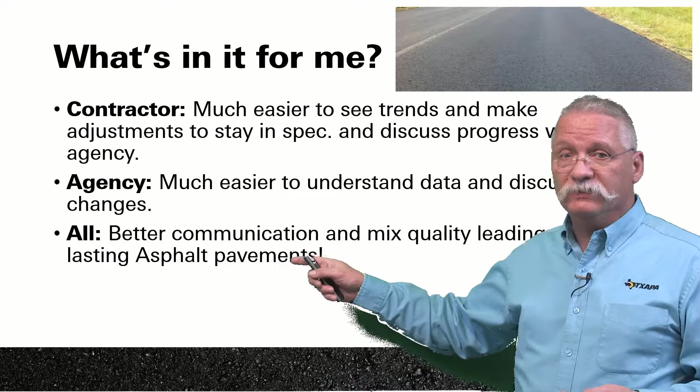From the agency, TxDOT, city, or county, when you start to see that, you can better understand the data, so you can understand with the contractors what's going on. So essentially what we're all talking about is better communication and better mix quality, leading to what, Harold? Longer lasting asphalt pavements. And that's what we want. So that's what we want.

And it also will make your daily debrief a breeze. And we can talk about daily debriefs all along, that's one of the things we talk about in all the classes. The PIQs everywhere we're talking about consistently is communicating daily what's going on at a job site. So that's a key aspect of the whole program here.

All right, so let's keep going here. And higher quality asphalt is what we're looking for. Get my belly out of the way. We want to make this easy. Okay, we want to make this easy.

So you've got asphalt plant operations and you've got laydown operations. There's lots of things happening at the plant, but essentially the things we're testing are moisture, temperature, gradation, binder content, and volumetrics. Out on the roadway, we're also measuring temperature as well as density and ride. So this is the data that we have that we're also getting paid for in many cases, and now we want to be able to use that information a little bit better than we have in the past.

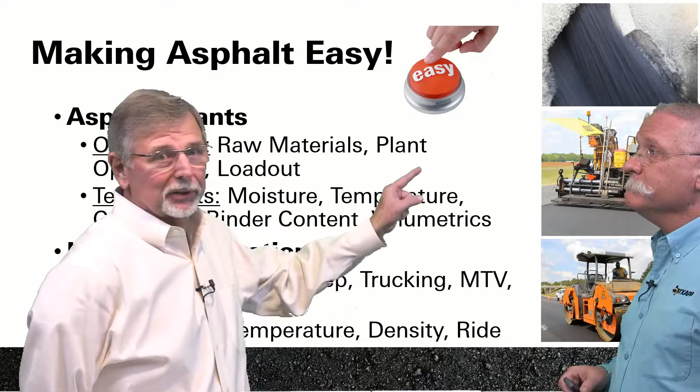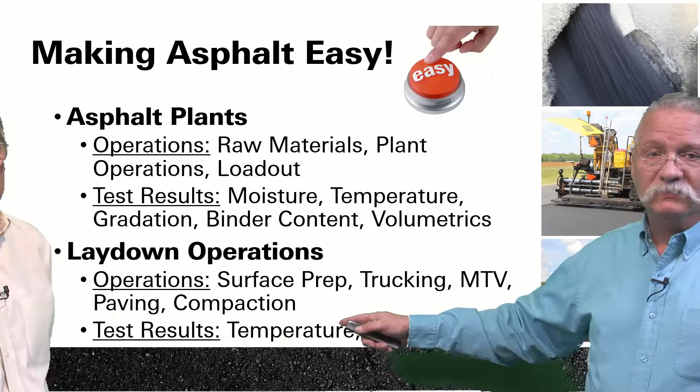So Jim, you're saying that this enhanced process control can make this -- I love punching the easy button -- it's going to make our lives easier? Oh, absolutely. You know, pick any one of these things and we could talk about it -- surface preparation, density, testing, all this kind of stuff. So let's get into a little bit more detail as we go in there.

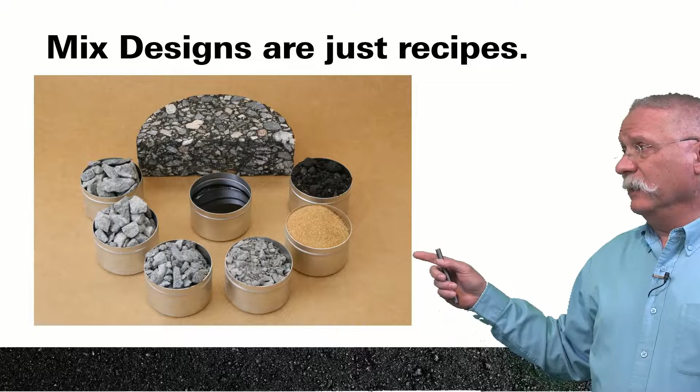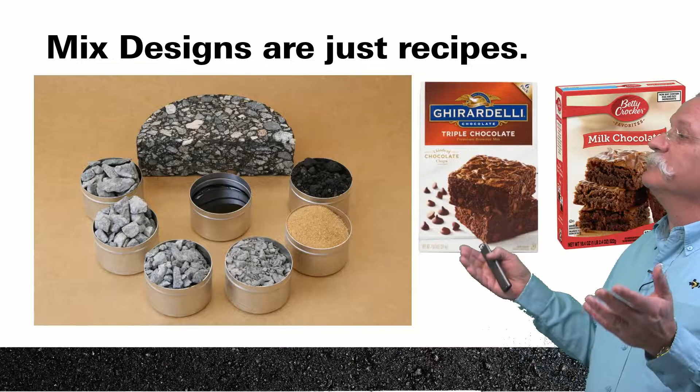You know, when we talk about a mix design, it's just a recipe, right? It's a recipe of certain combinations of different aggregates mixed with a certain combination of binder and reclaimed asphalt pavement to give us an end product. Really no different than what we see in the grocery store with a box mix of brownies. Everybody's got a different brownie mix, and different brownie mixes for different occasions -- you can get ones with sprinkles in it for your birthday if you want. So we can have different things in there, but again, they're just recipes. But let's talk a little bit in detail.

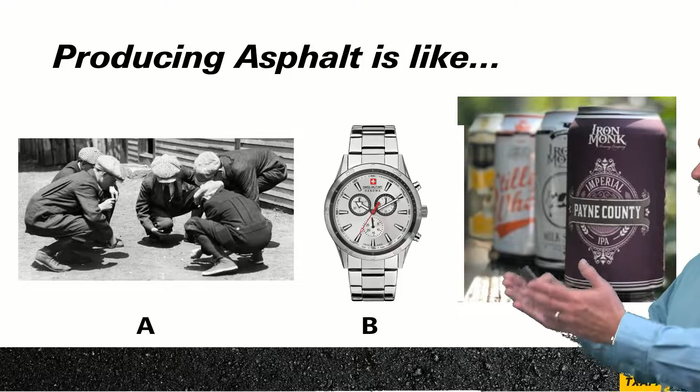Now I've got here, Harold, here's your first quiz of today. All right. Producing asphalt is either like shooting craps or rolling dice, building a Swiss watch, or making beer. What do you think? Well, shooting craps is a big gamble. Absolutely, that's for sure, so that's surely not it. That Swiss watch can be extremely complicated and expensive, so I don't think we'd go there. No. So, you know, beer has a great outcome, and I think that would be it -- C. All right, so you punch C, you hit C for me. All right, hit C. Oh, there it is.

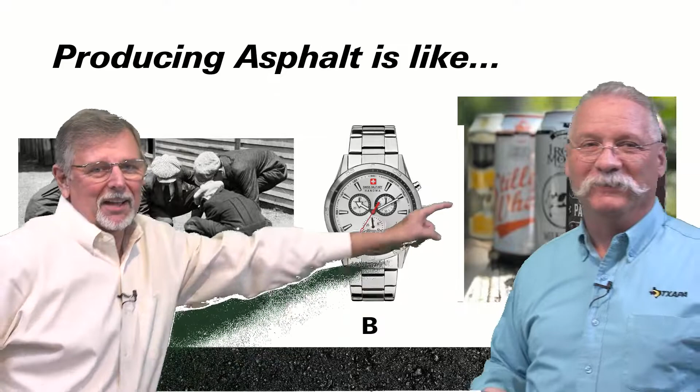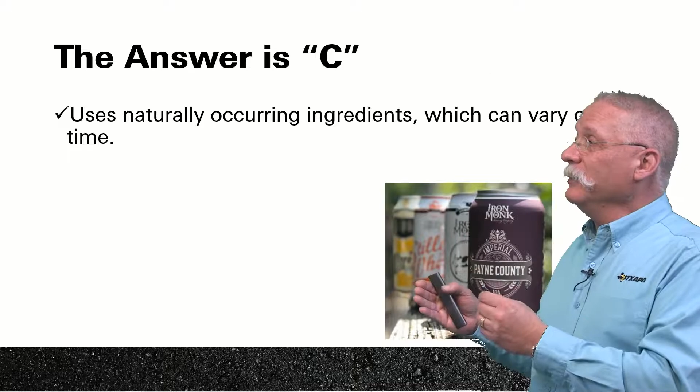There it is -- come on, I'm teaching Harold how to use the green screen. Okay, the answer is C. The issue here is we are using naturally occurring ingredients -- aggregates and asphalt binders -- but they can vary over time, just like a hop crop can vary. Our aggregate can vary a little bit, or our binder can vary a little bit.

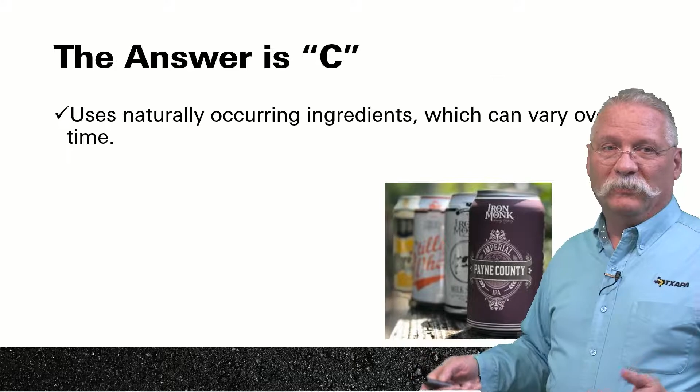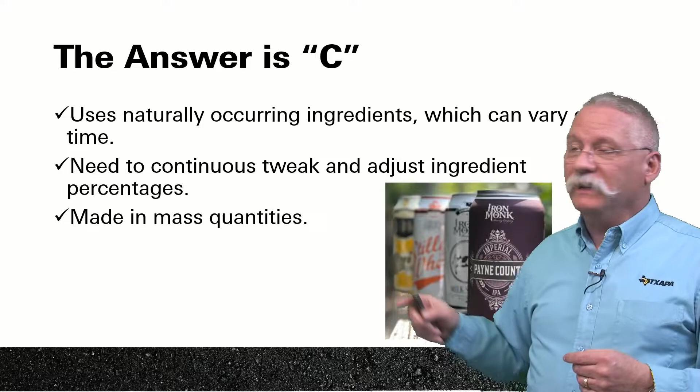So we have the need to continually tweak and adjust the material as we go through the process, and we are also making this in mass quantities. Just like they're making Budweiser, Miller Lite, or Lone Star beer, they're making a whole bunch of it.

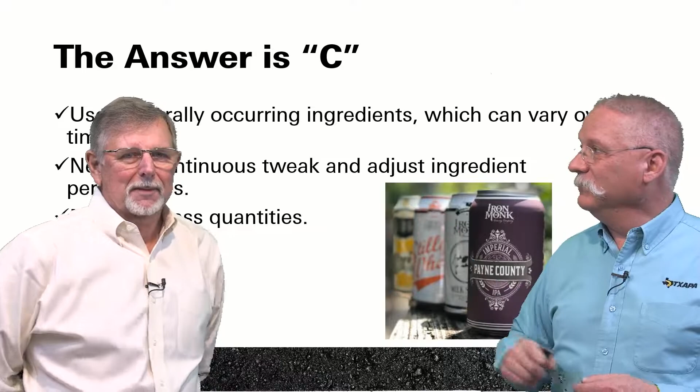So, you know, Jim, you've gotten really good at the pointing. I like that. Yeah, I'm getting better. Yeah, I just want to point that out. You should see me when I'm teaching, so I get hung up every once in a while. I'm going all different ways.

Ideally, the end result is it meets the customer's expectations, right? You bet. So if the beer doesn't taste right, or the beer changes a whole bunch and doesn't meet, you're not going to buy it anymore. If our asphalt doesn't meet the expectations of our customer, well, guess what? They're not going to buy it anymore.

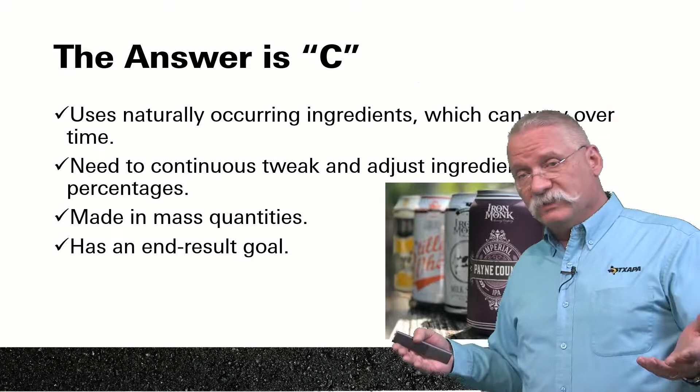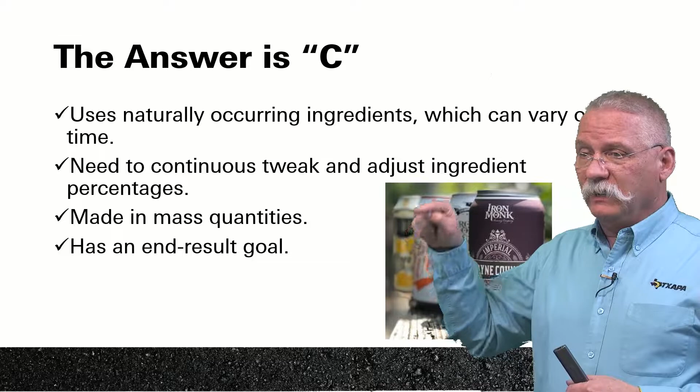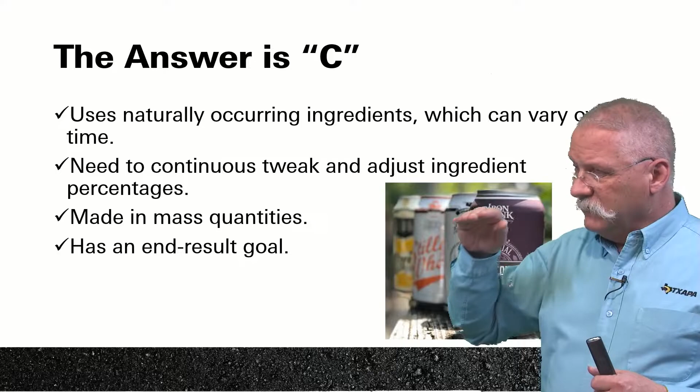So this is the opportunity we have, and just making sure everybody understands that there's a process here. You don't just plug in one time and you're going to run 10,000 tons of the same material. The QC people are actively working every day, making little adjustments to make sure that mix design meets specifications as it gets out to the roadway.

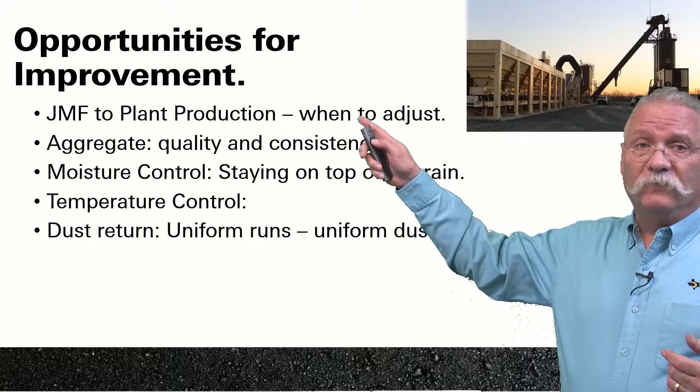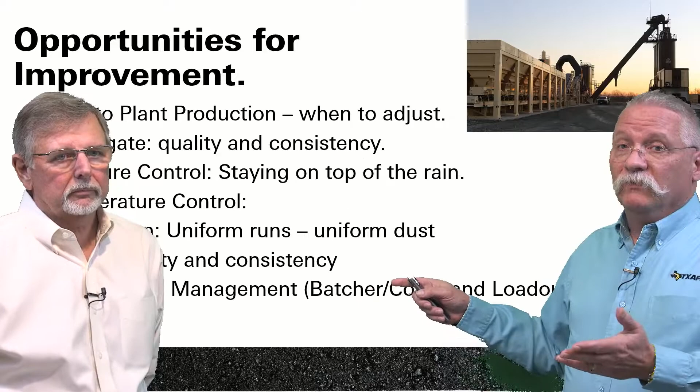So at the plant, there's lots of opportunities to make improvements, from the job mix formula to the aggregate to moisture control to temperature control, even to dust and binder quality as well. And finally, we're going to get that mix into a truck and get it out to the job site. You know, Jim, there's a couple items there I wanted to point out that I've really learned from you and Chuck and going out to the plants that we have out there.

And number one of those is moisture. It seems like we really don't pay a lot of attention to our moisture sometimes. Yeah, it's the moisture content. You know, asphalt plants are built on a certain specification. So many tons per hour at a certain altitude and at a certain moisture content, which is 5%. You go to most asphalt plants and say, hey, what's your moisture content? They're going to say it's 5%.

Is it actually 5%? Well, if it's West Texas and it hasn't rained in 3 months, it's probably not 5%. Right. If it's Houston, on most days during the week, it's probably not 5%. So we have to be able to adjust that. If my moisture content varies, my plant production is tied to that. My asphalt content is tied to that moisture content. So if I'm not adjusting that, I could have tweaks in my asphalt content just because I'm not managing my moisture properly. And then on the other side of that is that dust to asphalt ratio.

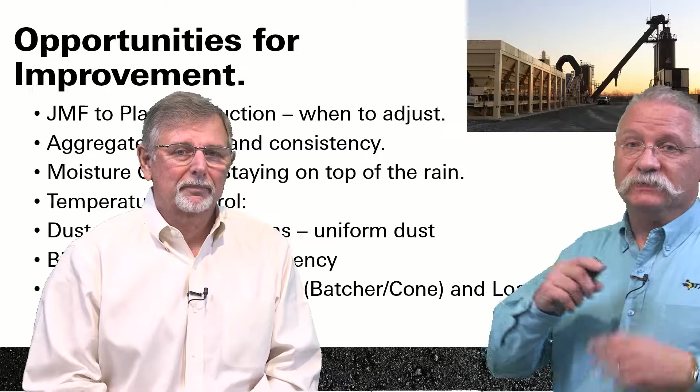Oh, absolutely. The dust coming back into your mix. Yeah, a little bit of dust goes a long way. On a standard asphalt operation, probably only about a third of the dust ends up going through that big vacuum cleaner we call a baghouse. Yeah. But we got to get that back into the mix. In most of the cases, we put it back in, but we have to meter it back in. It's going to go out at a given rate, and it's going to come back at a given rate,

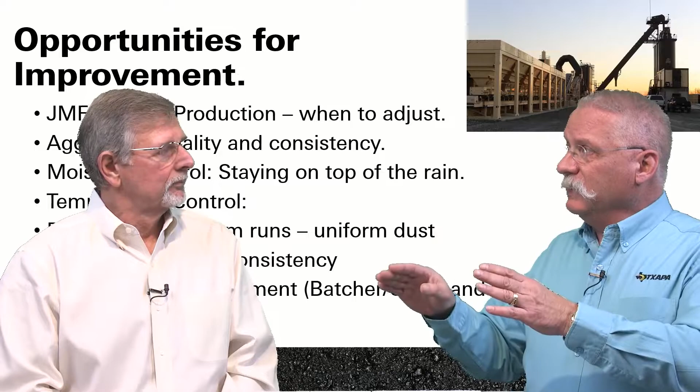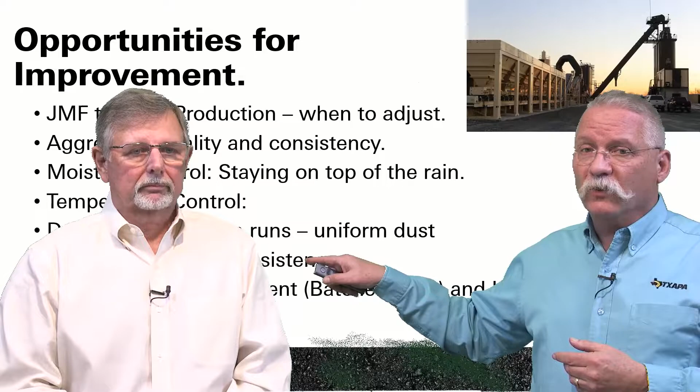which is adjustable. But even the quality of that dust is going to change depending on how we run the plant. If we're running the plant really fast and really slow and really fast and really slow, that's going to change the properties of that dust, and that could change the actual mix properties that we see coming out of the lab, or how the mix is actually performing in the field. So there's some issues there that we just need to keep a handle on. So again, it all goes back to consistency in the whole process.

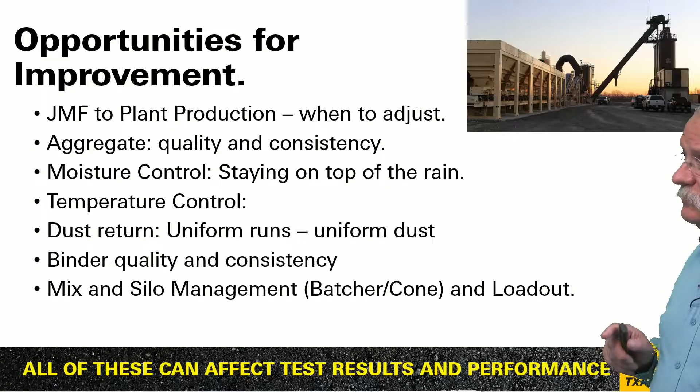So let's move on to the roadway. Again, all these can affect test results, and we're going to get to the test results in just a second, but I wanted to talk about all those little things that can affect that as well. So on the roadway, we got temperature. We're going to haul the material. How far are we going to haul the material? In what weather? Tarps. It's November now. And what thickness are we going to be laying it? Just the process of unloading that material out of the truck into the MTV. How we run the MTV could matter.

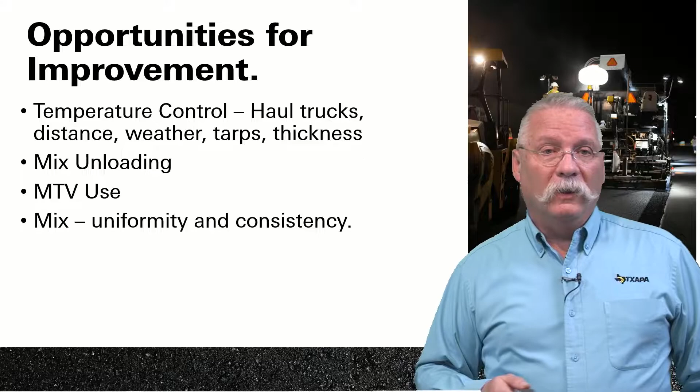Obviously we're looking for mix uniformity and consistency in the whole thing, but when we get to the paver, there's a lot of stuff that we cover in these classes, and the stuff that Chuck covers whenever he's out talking, these are the fundamental principles of how this stuff works. And then when you get back down to compaction, well, we've got to make sure we get density.

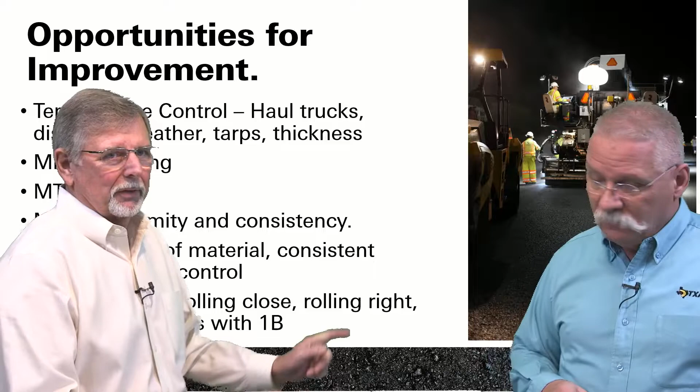You know, Jim, I'm going to try and use my finger here to do the pointing. Let me get out of the way. Yeah, let me get out of the way.

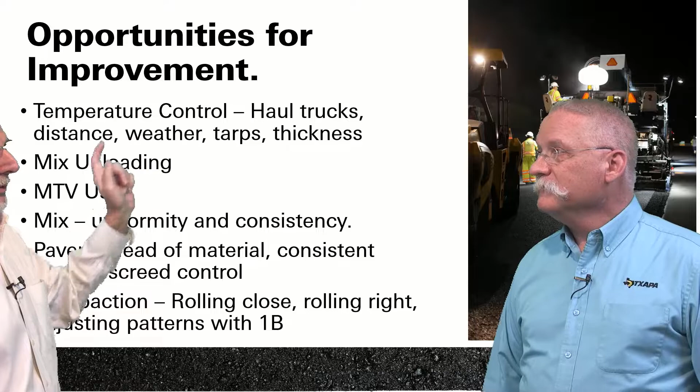One thing that you have always harped on is temperature control. Because we were out there on a job site not too long ago, and you were the only guy out there who had one of your useful tools. Yes. And actually we just bought some more. Chuck bought some more to use in the field.

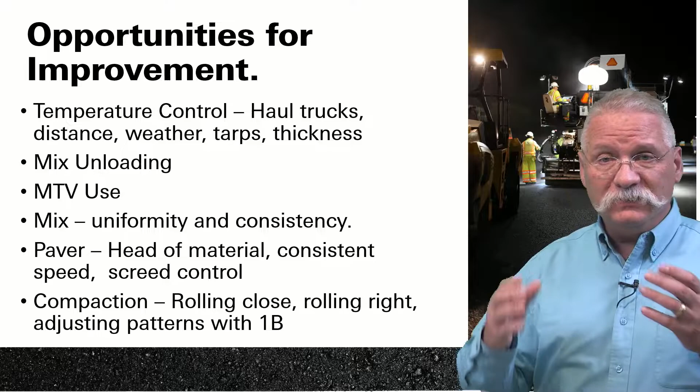Temperature is absolutely critical. Temperature sets the pavement up to allow us to roll the material. Okay? And if the temperature is varying or the temperature is too cold to start with, we're never going to get the density. And if we don't get density, we're not going to get performance. They're completely tied together, straight on down the road, and I don't care what anybody else says. I know it. That's it. And we're done arguing over it. We've got to get the material compacted in the right place. So that's certainly one of those very important elements.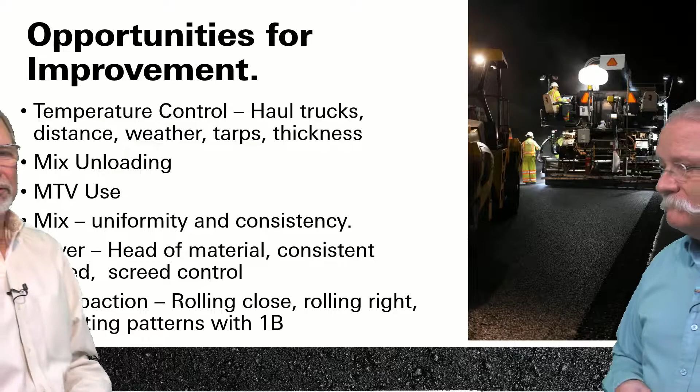Yeah, like you said, we've spent all that time getting it together in a nice tight mass at the asphalt plant, getting it in a truck in a nice tight mass. But when we lay it out on a roadway, or we dump it into the hopper and we don't dump it in properly, or we stretch it out, or we get too thin between truckloads, guess what we can start causing again? We can start causing segregation. So segregation, obviously we know that's not a good thing. That's detrimental to the quality of it.

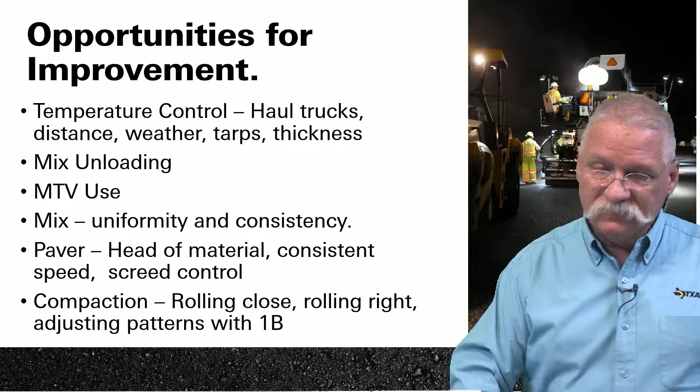So we need to be able to control our process all the way. We always want to keep the mix in a mass, no matter what we're doing. If we're shoveling it, we want to keep it in a mass. If we're making it, we want to keep it in a mass. And anywhere in between, we want to make sure we keep that mix in a mass. So all this stuff's important. Again, all these can affect the test results, and all these can affect performance. So these are the types of things that we want to look at.

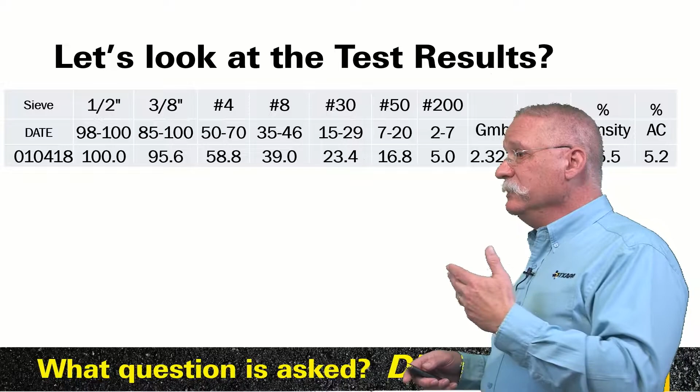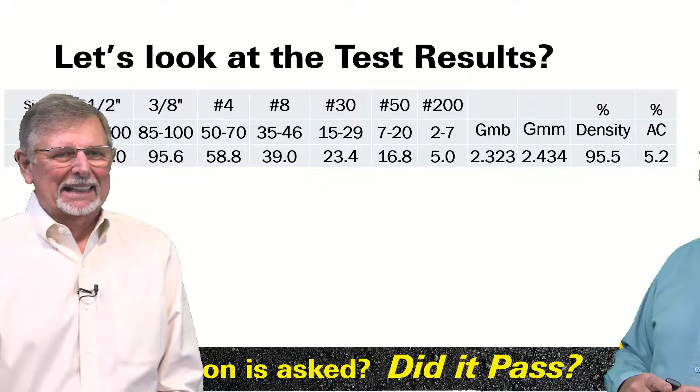So we've talked about numbers already, okay? And so here's some numbers, Harold. I know your background is not engineering, but you've been around a long time. So tell me what you think. How do those numbers look? Yeah, they're pretty good, but I don't know what to compare them to. They're static numbers to me.

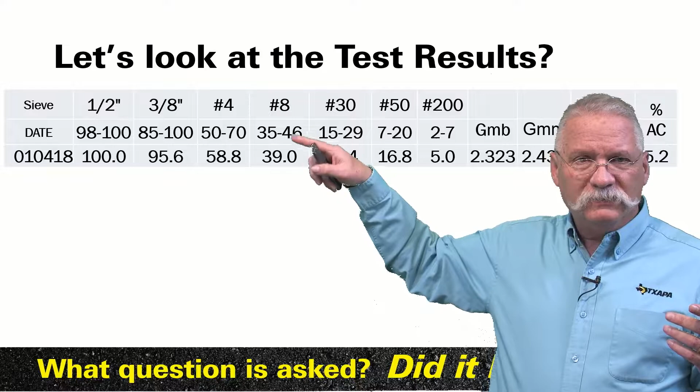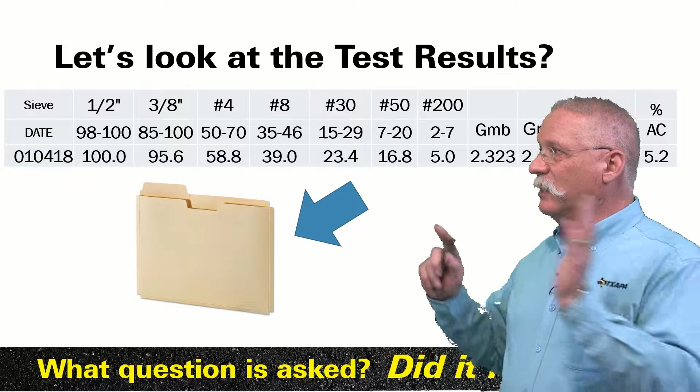Yeah, right, they're static numbers, and that's what happens a lot of times: we see the numbers and go, well, that one seems to be in. That one seems to be in. Good enough. Okay. The big question is, did it pass? Exactly, that's the big question. And then once it passes, they go into a folder or get loaded off somewhere. So that can be a problem. There's a lot of potential here to use this information.

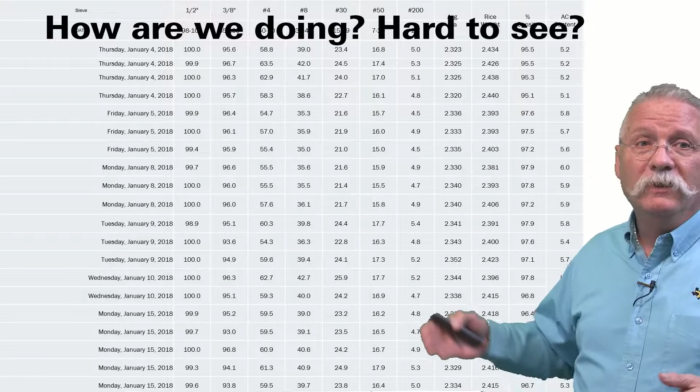Now, here's a little bit more information, Harold. How does this look to you? Yeah, this looks very, very complicated. I can't take a lot from that. Yes, exactly. And so when you've got a big pile of data, sometimes it's called data overload. I'm not sure, I'm looking for outliers or whatever. But it's not really a good way of using the data effectively. So let's break it down and let's graph it.

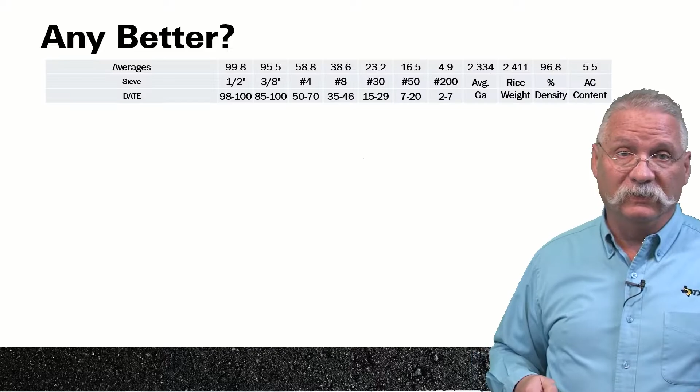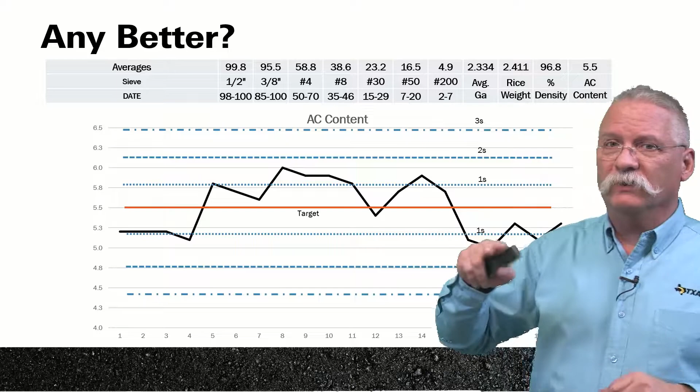Okay, now we talk about using process control charts. It's in the specification, but let's actually start using it. And this is the enhanced part that we were trying to get to a little bit earlier. That enhanced part is looking at the data in this whole process. So here's our target line right here in the middle. And then we've got these other dashed lines above and below. Do you know what those are? The first set of dashed lines is one standard deviation of the variability of that material. Now you contractors, and we'll talk about this in just a second.

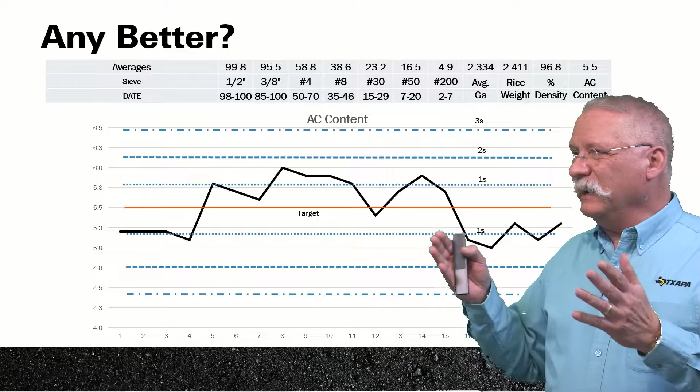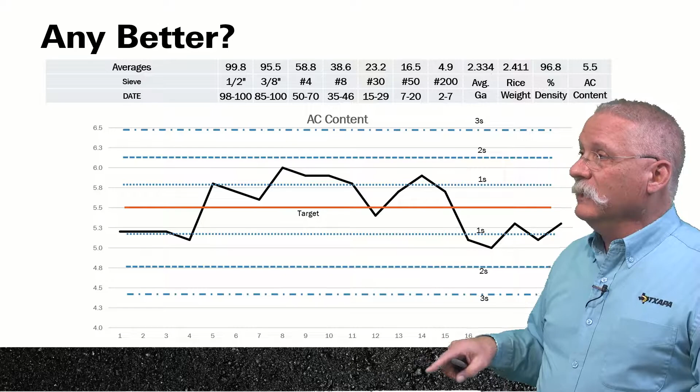The second set of lines is 2 standard deviations, and the third is 3 standard deviations. For a normally distributed material, which we generally consider asphalt to be, about 68% of the data should fall within 1 standard deviation under normal conditions. 2 standard deviations is about 95, 96%, so most all of it. And 3 standard deviations, I think it's like 99.6%. So pretty much all of it, but not exactly all of it. You could get a flyer out here, down here, and still be a statistically valid test.

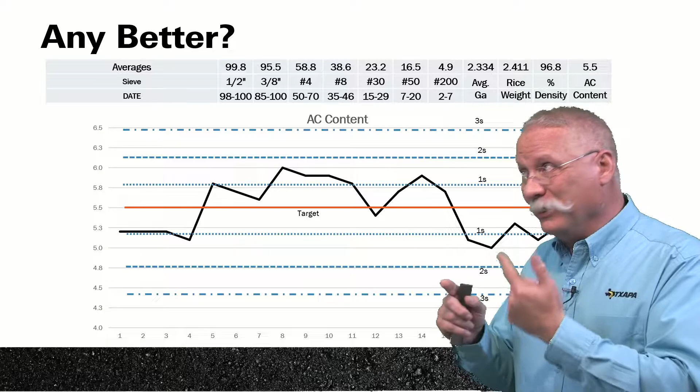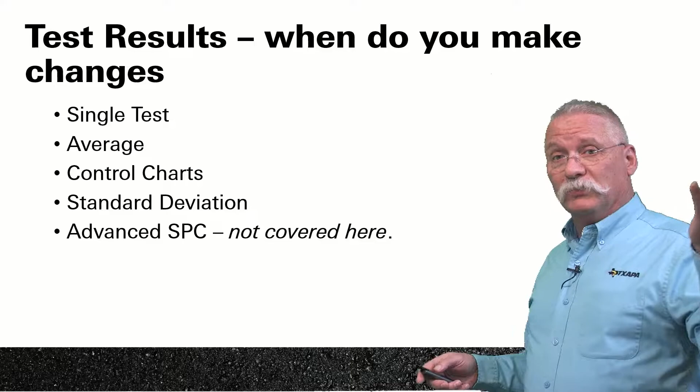So this is the process that we have to go through. Again, we've got to make sure we sample right, and we're assuming all along now that we've sampled right and we've tested right. Now we're looking at pure material variability in this process. We can look at it a number of different ways. We can look at single tests, average tests. We can use the control charts we just talked about. We can use standard deviation, which brings up horror for people who had statistics. We could use advanced statistical process control. And we need to understand the process capability.

But in reality, I never want to make a judgment on a single test. I never want to make a change on a single test. There's too much money involved, and there could be a whoops. Heck, a half a shovelful difference, if some of that coarse material or some of that fine material fell off, could throw my asphalt content off. I want to verify that, so I always want to see multiple tests. Now, if I do a single test, a QC or process test, and I don't see something I like, I'm not going to wait 2 hours. I'm immediately going to go get another test and see what's going on.

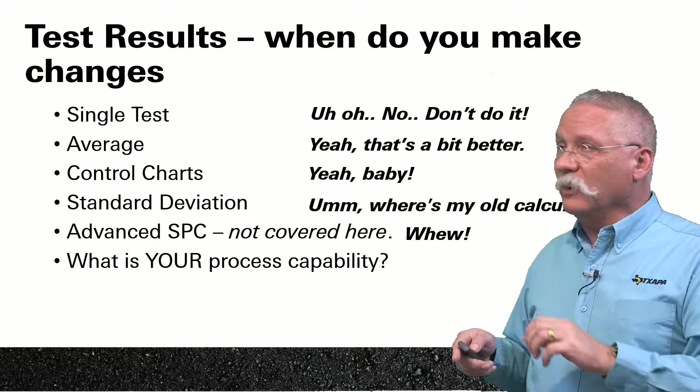So that's better. Control charts, I think they're extraordinarily positive and we need to use them wherever we can. Standard deviations get a bad rap, but it's simple. With the old calculators, you had to do all the math. Now you've got Excel. It's a function, STDEV, and it'll calculate it for you. There's all kinds of higher order statistical process control you could get into. We're not going to talk about that today, but we do want to talk about process capability. What do you think that means?

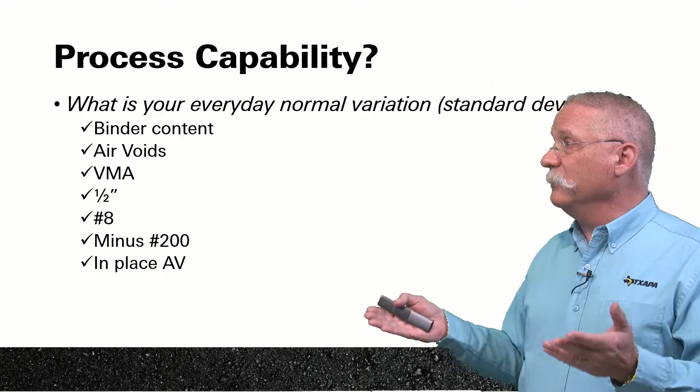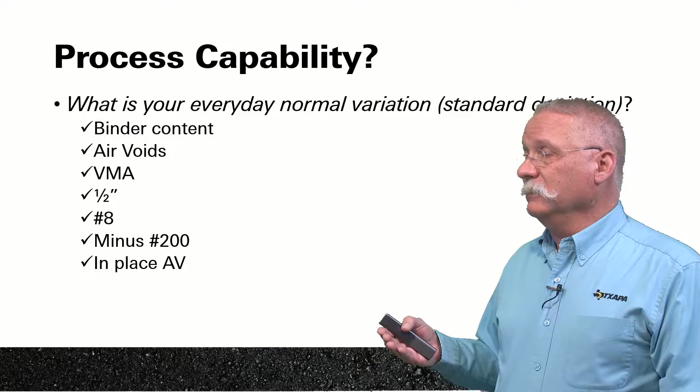Great question. It's essentially what your normal variability is on a given day. Take any of these properties, let's take binder content. If the specification is plus or minus 0.5%, and I'm designing at 5, so I've got 4.5 to 5.5%, I've got to stay in that tolerance. What can you actually produce within? Is my process capability 0.5%? Well, it better not be, because then you're going to have a problem, because any sort of tweak off that average and you're going to be out of spec. But is it 0.3? Is it 0.15? Do you know?

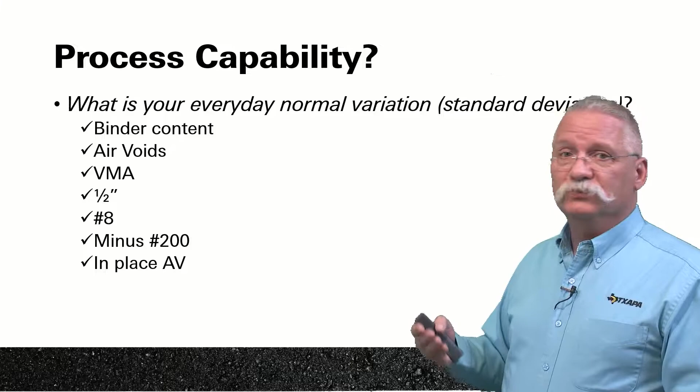And that's the question we're trying to have that discussion about today: starting to understand what your process capability is to better understand how to control the material. The lower your standard deviation, the more you know, if you have to make a change, which way to move. If you have a huge standard deviation, I'm not sure what to do at that point. So what can you rely on on a daily basis?

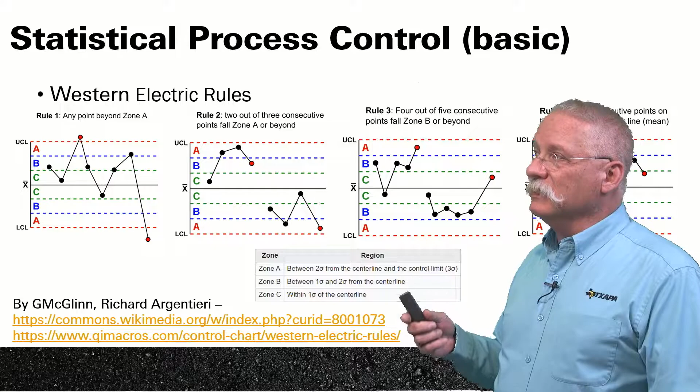So there are some rules that were developed. This manufacturing idea of looking at data started back, I believe, in the 20s, and was further codified in the 50s. Western Electric came up with some ways of looking at the data. Same chart: you've got your average in the middle, plus or minus 1, 2, and 3 standard deviations. But then they said, what happens if I'm way out? If I've exceeded my 3 standard deviations, that happens a pretty small percentage of time. There's probably something wrong there that we want to look at pretty quickly.

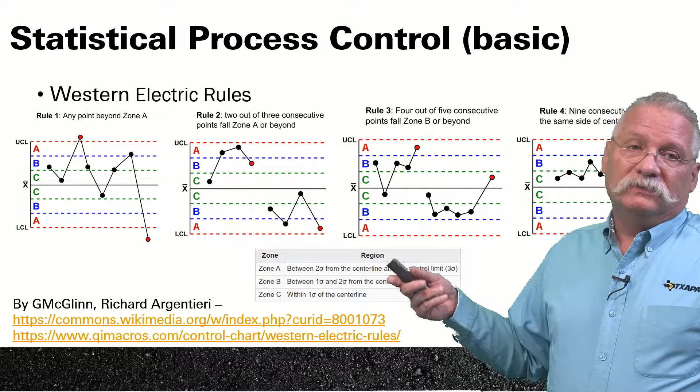And in the second rule, and again, there are 6 to 8 rules depending on which source you get, rule 2 is 2 out of 3 consecutive points fall in zone A or beyond. So you've got 2 points in your 3rd standard deviation, and you're at your upper limit there. But if you don't know what your standard deviation is, it's hard to figure out where to even start. So here are the rules themselves. They've even named them, and they talk about what they are.

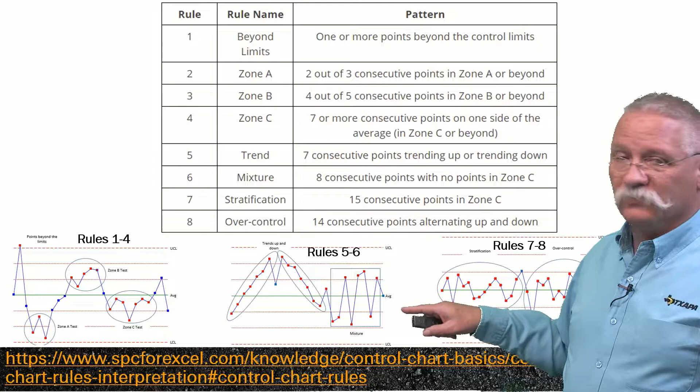We're not going to go through this in much detail today, but any Google search will probably bring up 150 sources on this. Just look up Western Electric rules and how to interpret them. The neat thing about this, I found the other day, is within those rules they further codified what could be going on.

So you look at this one, Harold. What's number 1 at the top there? Let's try out your finger again, see if it still works. Okay, here we go, keep going. Number 1, what's at the top? Yay, right there, we got a new guy, a new person doing a job.

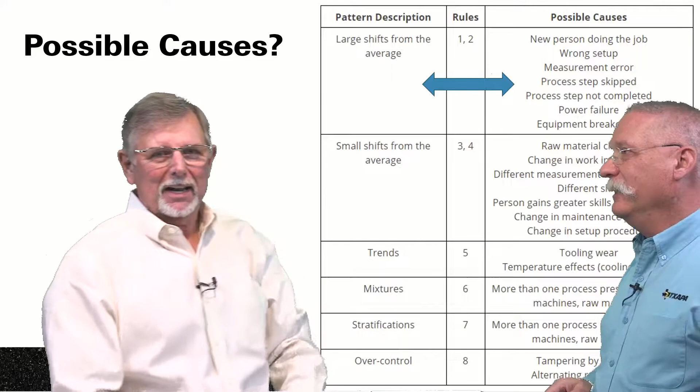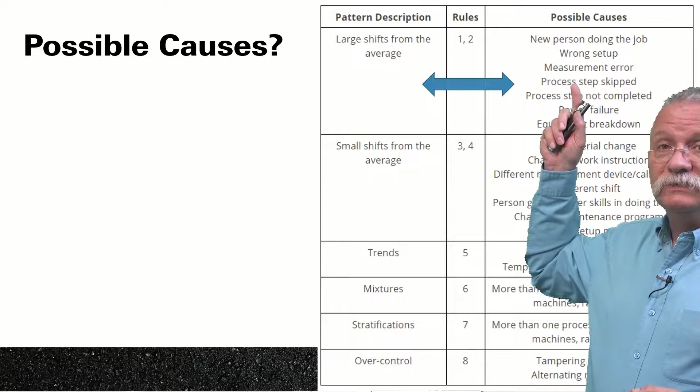So they may not know all the intricate details of the process. They may have just had a measurement error, maybe they transposed the number. That can happen. Or we skipped a step, or we didn't complete a step, or took a shortcut.

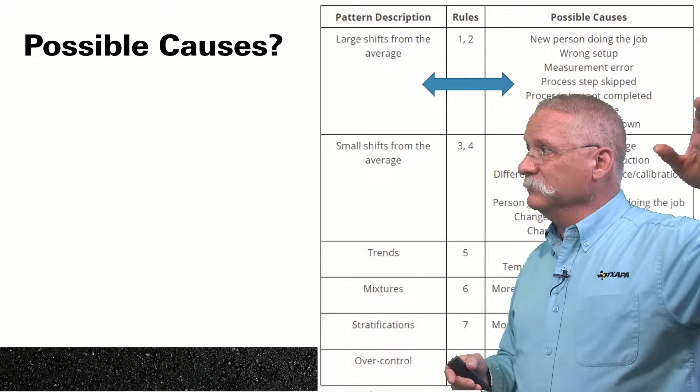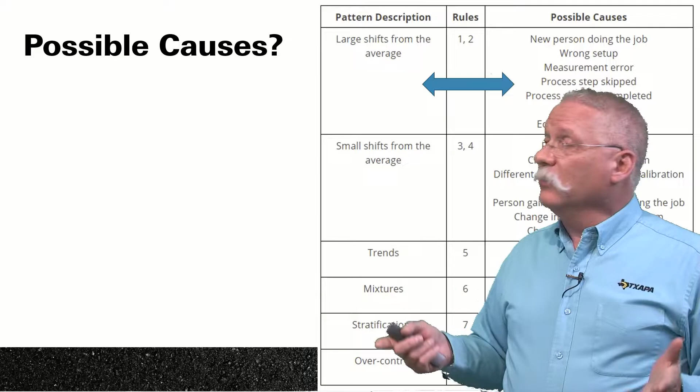Right across our parking lot is the HMAC, where they do all the certification and training. I know Corey and his band of brothers and sisters over there, they preach every day: run the test the way it was designed to be run, and don't take any shortcuts. Because when you take a shortcut, we don't really know what to compare against. This is the process of going through these things.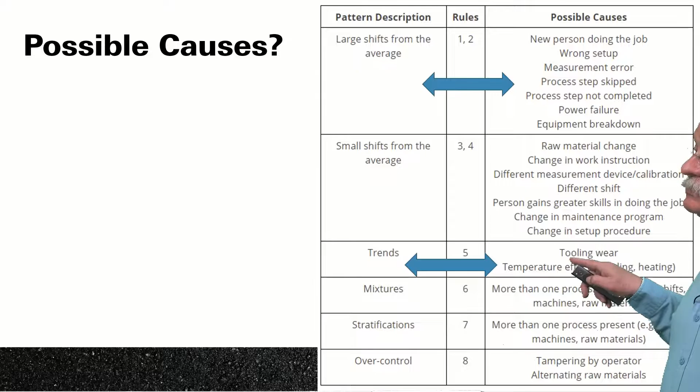And there's some cool stuff in here. If you get certain kinds of trends, you might say, well, maybe something's just wearing out. We have to do some maintenance on our equipment along the way.

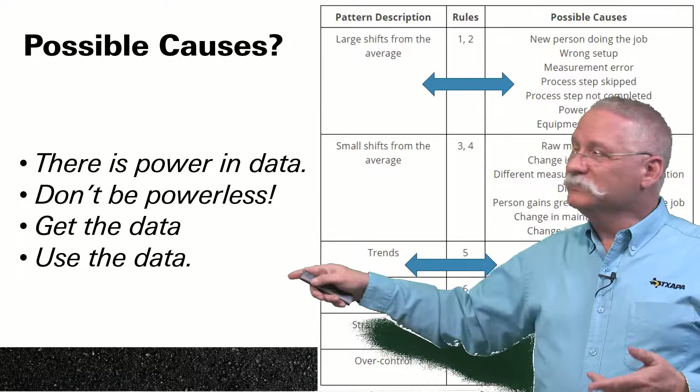So just real quick here, there's power in the data. Don't be powerless, use the data. Get the data, use it, it's already out there. So let's talk about the roadway real quick.

This is a favorite video of mine, a clip we picked up back during COVID. This is on Westheimer, and if anybody's been down Westheimer, you know you could never do work in the daytime, but because of COVID, they were actually working during the daytime. You can see one roller, and two rollers breakdown rolling behind the paver, and I can still see everybody behind the paver, which means they're working closely.

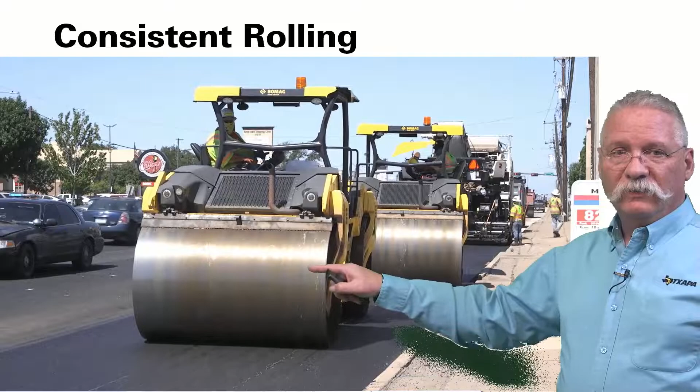Look at that reversing, see how they're turning crosswise and not stopping square as they reverse? I love double breakdown rollers because they keep each other in check, and they can cover the whole width of the mat in one pass. I really think there's a great opportunity here to cover that full width in one pass with these two rollers.

So again, here's the same roller going the other direction, a different crew doing the same thing. So they have a standard operating procedure, they're on top of it, and that mat looked absolutely gorgeous.

When we talk about density, that's what we're getting paid on. We're getting paid on in-place air voids, and so we need to know what those numbers are. We need to understand the effect of moisture and density and temperature on density.

And we also come back to consistency. We're always preaching consistency because consistency yields consistent results. So the best management practice, the BMPs here, are understanding how to balance that operation between what the plant can produce, what the trucks can haul, what the paver can lay, and what the rollers can compact, having them all working on the same play sheet, if you will.

From the QC perspective, correlating their gauge to core, field core, it should be done every day. We should know what we're doing before we take a core.

They should, once they mark the location, set the gauge down, get some readings, log it in a book. When they get the core results back from the lab, they write it in there and figure out what the running correlation is between the gauge and the cores. So if I dial my gauge into my cores, that means I know before I finish rolling what I'm going to get paid within, with high precision.

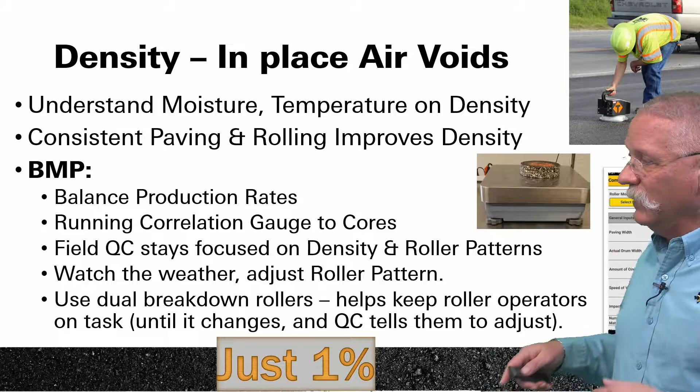And again, I'm a big fan of dual double drum rollers. Different people have got ideas, but I've seen that work with some pretty severe specifications. So kind of wrapping it up here, from this perspective, we always want to determine what our capabilities are, right?

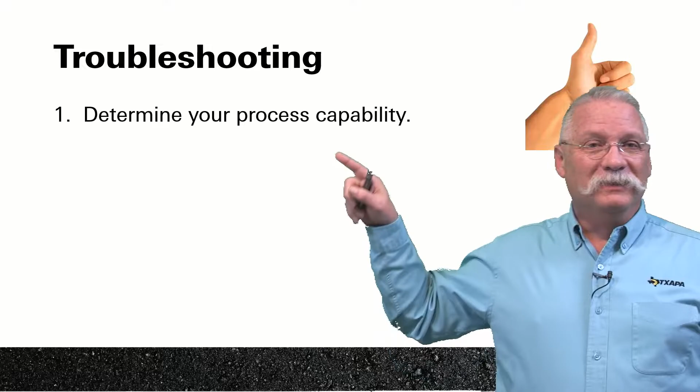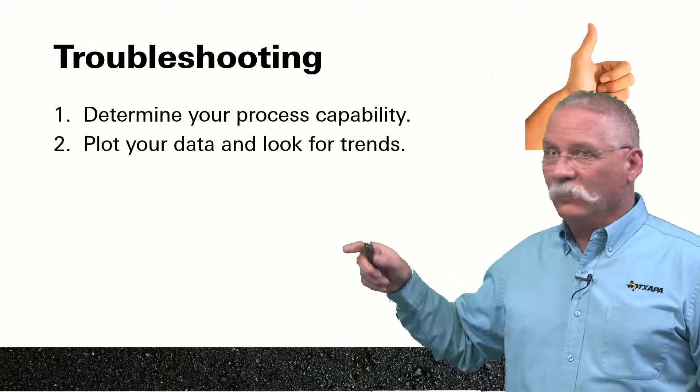Harold, can you still run a 4-minute mile? No, sir, I cannot. Neither can I, but a man's got to know his limitations. So we got to understand our capability. If I was plotting data back when I was running before my knees gave out, I kind of knew what I could do, and it wasn't even close to 4 minutes.

So that lets you know to look for trends in your data, and this is a big one for everybody out there. Be real careful about making a single point change. If one piece of data says there's an issue, always verify and validate that. You may want to put everybody on alert, but make your change once you've got the data to support it.

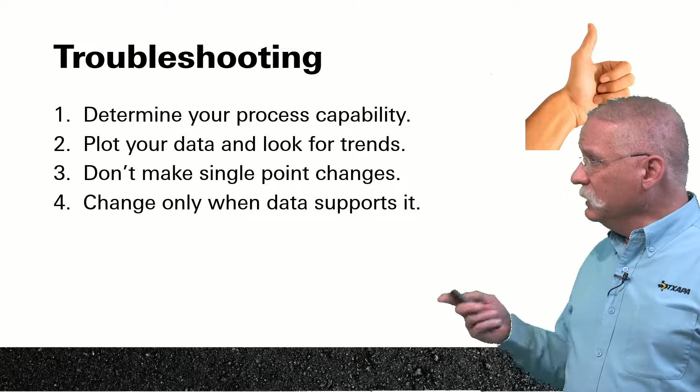And that means we've got to be looking at the data and sharing that data. One of the things we talk about in the classes is this group text idea.

When we set up a job, pre-paving, we exchange all the phone numbers from everybody's cell phone and set up a group text. You want your 1As at the plant, your 1Bs in the field, your inspector, your superintendent, your QC manager, maybe even your plant guy, all on this group text. So as soon as you start getting data or information, you send a text out. Everybody gets it, everybody's in the loop, there's no surprises.

I hate surprises. And I know contractors don't like surprises, and I know DOT doesn't like surprises. So this is a great way of doing that.

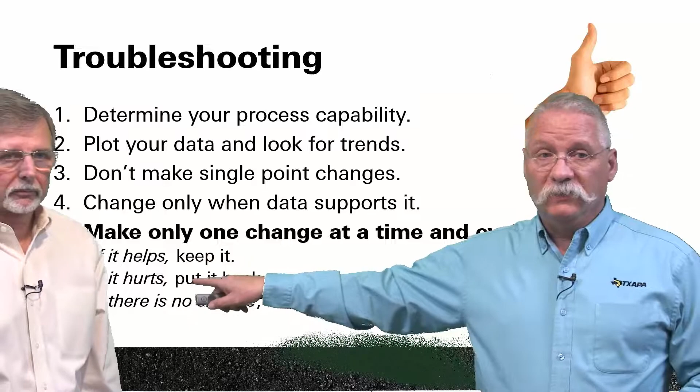But when we do make a change, we only want to make one change at a time. Here's your process: if it helps, keep it. If it hurts, put it back the other way. And if there is no change, look for interactions and cost implications that there might be with the data itself, because that's really what we need to be doing in order to make good quality asphalt.

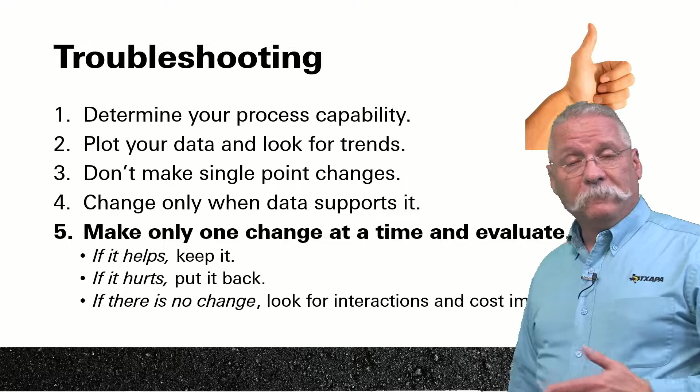So I think we're pretty much good. Remember to chart your success, and remember, quality is not an accident. There's a lot of work that's being done to make these pavements done properly. A good QC program is proactive, not reactive. We want to make changes before they become an issue. If I'm looking at my data and I see a trend, I can make a small adjustment and stay in and ride it home.

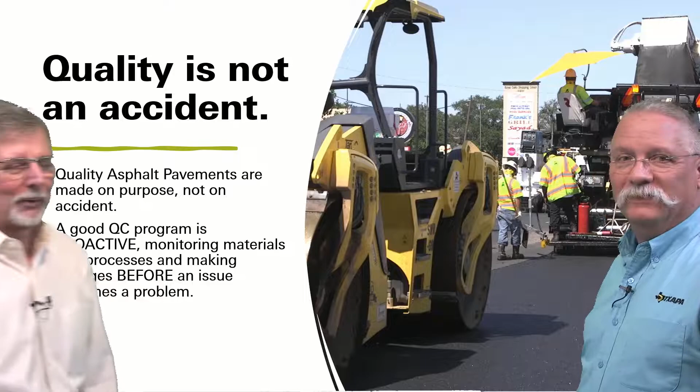So that's pretty much it. You had to use that active word there, didn't you? It's proactive. We want to be proactive in our approach, proactive in keeping up with the data. We want to use visual charts so visual learners can actually keep up with what's going on, and track our success that way, or what might be happening.